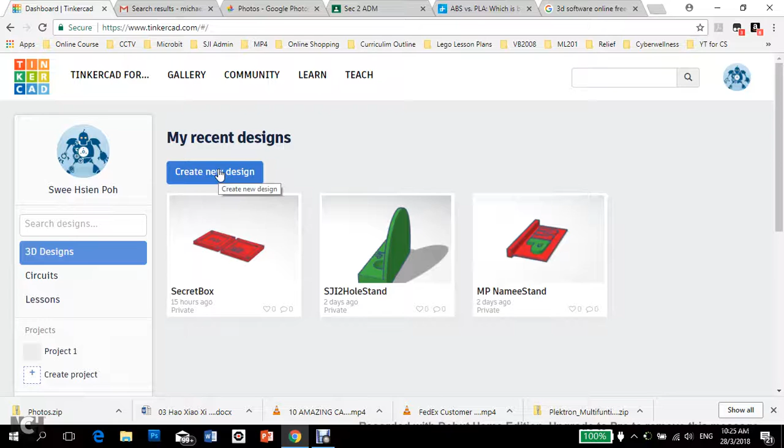You can go to Learn. If you want to learn about 3D design, you can have a step-by-step lesson which they offer at the bottom here, like how to create holes, how to control the camera, and learning the movement, scaling, copying, and after that of course doing your own stuff.

So what is then for the 3D printer that we are using, right? Basically we are using Cubicon. As you can see, it is basically a Korean product.

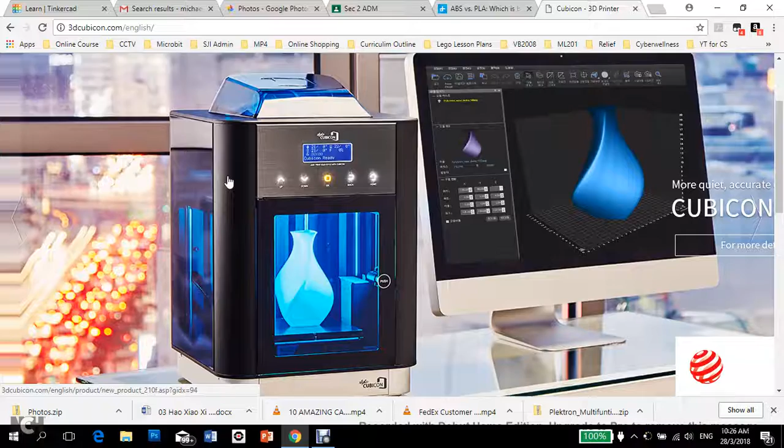What we are doing is using this Cubicon Single Plus that you see. For more detail, of course, you can always click on here, 3D Cubicon, and look at it. This is the product and the element that you are using.

There are two colors basically, and it's good for customer use. You can go in and take a look at 3D printing. This is not cheap.

Let's say a 3D printing studio in Singapore holds this product. Singapore 3D Printing Studio is at Lavender Street. We went for this training, so this is the place, and they actually offer workshops. And of course, this is the boss, Jason Drew.

Our course was conducted by him, and if you want, you can look at the product in Asia 3D Printer. You can see that this 3D printer that they are holding is something like this - this is the white color Cubicon.

So once you read more, you can see that they have more information. So you realize that yeah, it is a printer. It starts from 5,999. Of course the technical specification, if you are interested, they have an LCD printer.

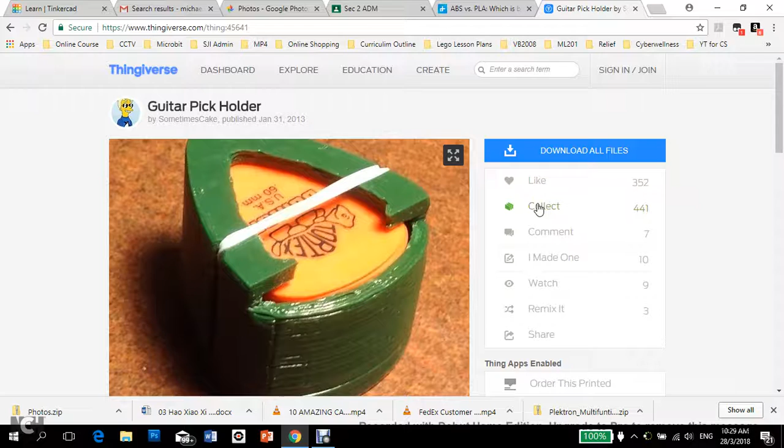We will just download all the files. Once it's downloaded, it's in a zip file, you can extract this file in your computer - extract all. Once you extract all, you will see this guitar pick holder. Inside there's an STL file. There are three - one is the main box, one is the top, and one's the backing plate. So you might need to actually print out the whole thing.

Let's take a look, so you might want to read carefully about this. So he tried his hand on one. To assemble it, he used two of his daughter's hair rubber bands. This is where the rubber band goes in.

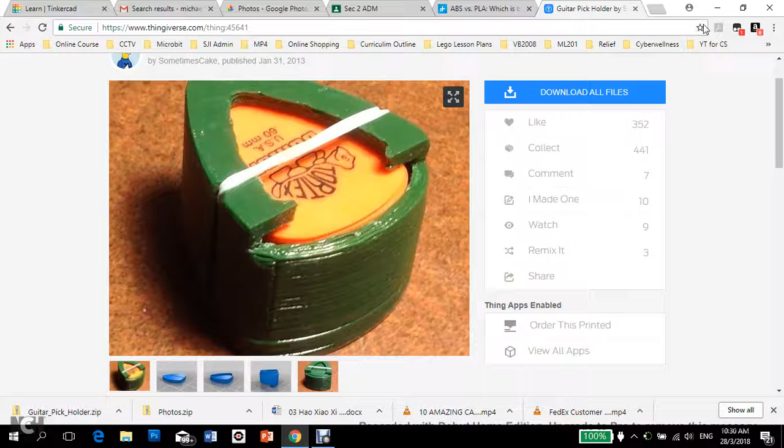Once you have downloaded the file, the next thing to do is go to the IT department and get them to install this Cubicreator for you. With Cubicreator, you can export all this file as a G-code, which you'll then be able to print using the Cubicon.

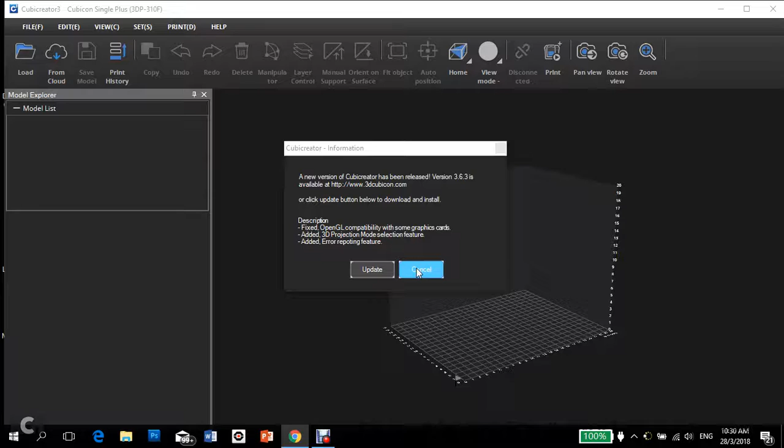So don't need to update. This is the Cubicon single plus. You just load the file that you want. Down here we have the downloads, we have just now what we downloaded. Okay, where is the file that we downloaded just now?

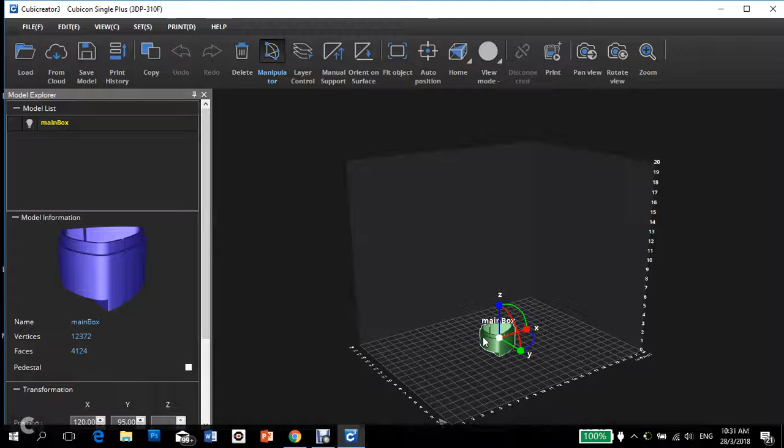Plektron multifunction, is it this one? No, guitar pick holder. Okay, it's a guitar pick holder. Double click inside, we just click on the main box, and the main box will come here. Of course, you see the main box doesn't have the top and bottom, so it's good to load the backing plate together, which is here.

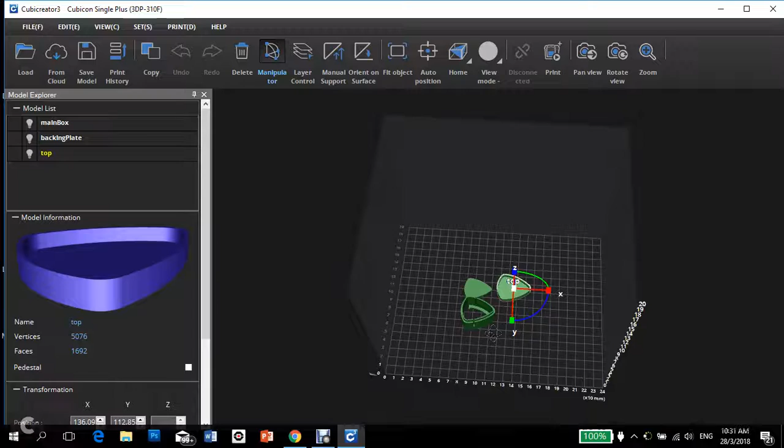You can right click and move around, and of course you can also load in the top, so they'll arrange it themselves. If you want, you can move them around as and when you like it. Once you finish, you can go to print.

This is the more interesting part. Once you print, they will allow you to do a user setting. You might want to choose PLA or ABS. ABS has the higher melting point. You can read about the use of ABS or PLA in

digitaltrends.com, so you can read about the comparison of materials. They would say which one you'd prefer more. So of course, ABS has a higher melting point, so it tends to not warp so easily, and is normally preferred for professional applications.

So you can try this. PLA, of course, is nicer to play around with. It has a sweet smell, and of course it has a lower melting point, meaning if it's used in a high temperature setting it might melt.

Once you finish, these are some basic settings that you might want to explore. We might want to use ABS printing. After that, you might want to have a slower printing for high quality, or fast printing. Of course, you can always go for standard.

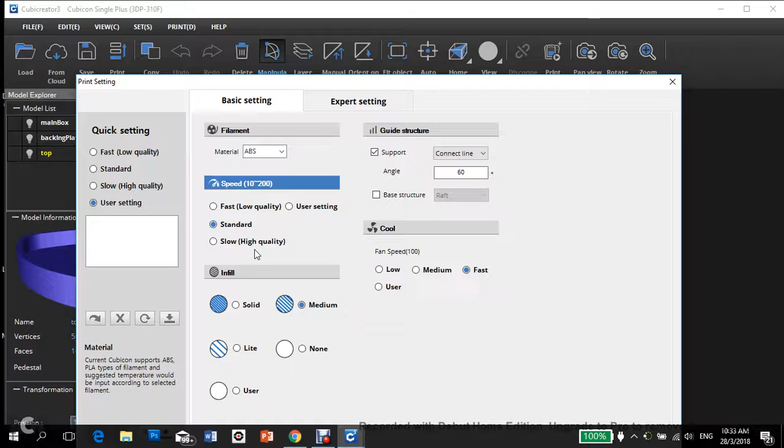This is the infill inside the 3D printing. Solid, of course, will take more time; Lite will take less time. If you have none, that means they'll just print the outside of the 3D print.

You might want to have a base structure. If your structure wants to mount on the piece, then you can tear it off later. If not, you can forget about this and just print out the support using connect lines. For the fan speed, you can use it to be fast or medium.

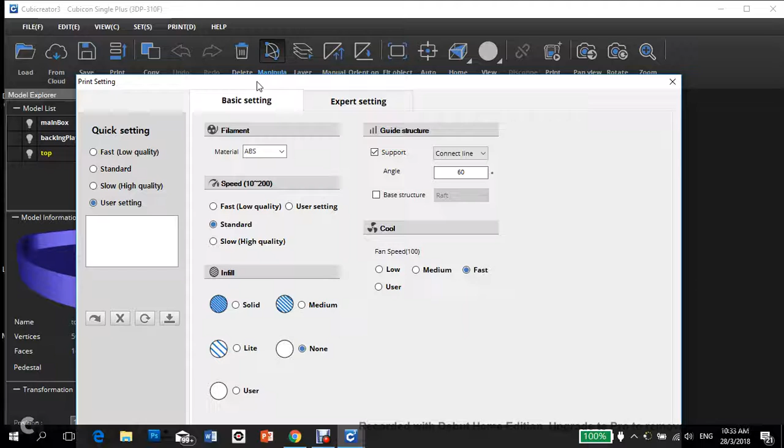Once you finish all this setting, there's the expert setting, where of course you can control more things, but you can do that on your own.

After that, you can do a G-code download, save the G-code into your file, the guitar pick holder. You can save it inside here. You realize it's called ABS top, so you might want to rename it so that you know what this is about and which material you used. So, guitar pick holder. This is something that you want to do, then you can save, and you can see that it's slicing the model.

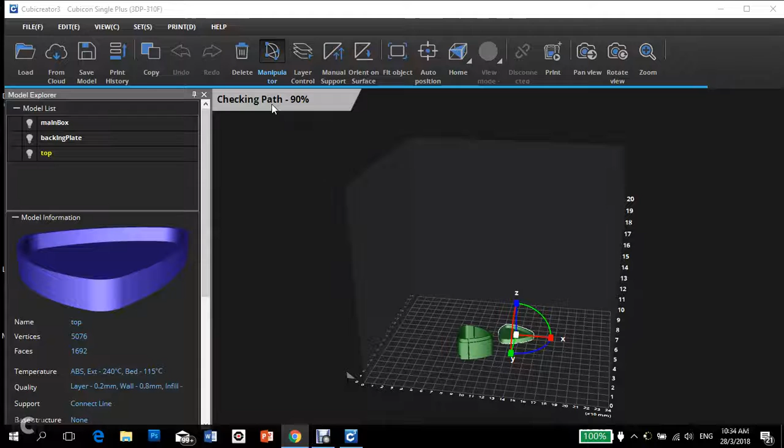Once the model has finished slicing, it's saved inside. It tells you how much time it takes to print this. This one is 47 minutes and it costs you 2.95 meters, weighing around 7.838 grams.

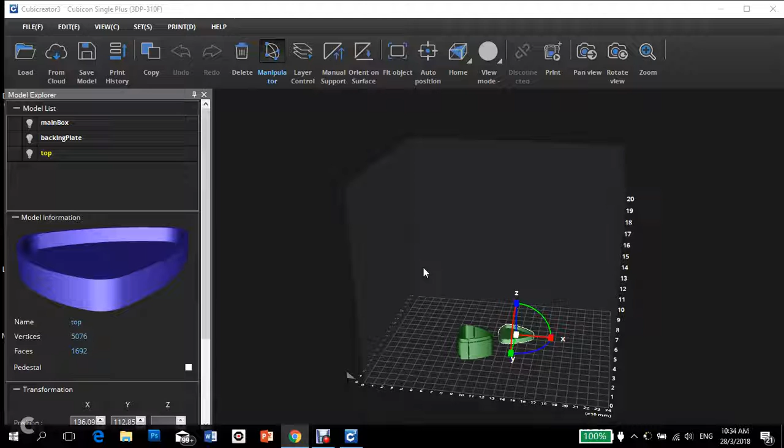Alright, so if there's time, we'll just show you how the printing works using a few guitar picks. Alright, that's all for today's intro for 3D printing. Hope you enjoy, see you.